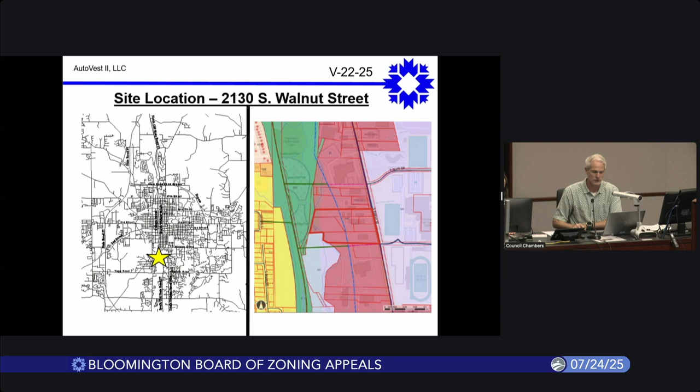So the overall petition site encompasses several properties. One of those is an existing Kia dealership that is located on the south end of the site. The petitioner has acquired several properties to the north of that dealership, and will be looking to remove all of those buildings and parking areas to expand the display area for vehicles for sale for the Kia dealership.

The property also has Clear Creek on the west side of the property with its associated floodplain and riparian buffer, as well as a substantial amount of trees on that. The property in general is relatively flat along the east side of the site, and then there's kind of a steep drop-off as it drops down, and that's where you have all of the floodplain and the trees that are being preserved in the riparian buffer.

So as I mentioned, the petitioner is requesting to expand this use on the site by removing all of the buildings and parking area to the north to allow for that to be converted to new display area.

So in your packet, you do see a site plan, which is also displayed on the screen here. This incorporates several new islands within the site as required. Islands are required not more than every 10 spaces. Each of those islands is also required to have a tall canopy tree as well as 4 shrubs.

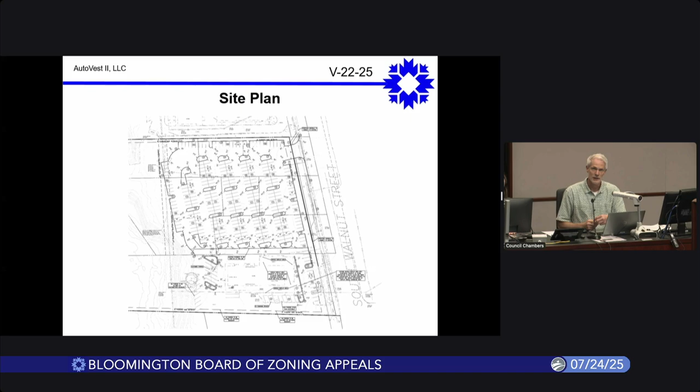So one of the variances being requested tonight is to not require each of those islands to have a tall canopy tree. Instead, the petitioner has shown those to be planted with small species trees. They are showing all of the shrubs required within those islands, but they're requesting a variance to not require the tall canopy trees.

The other 2 variances they're requesting in regards to landscaping involve the total number of shrubs required. With this petition, the petitioner is showing a total of 323 parking spaces, so that would require a total of 969 shrubs. With the 323 parking spaces, they are also required to have 81 tall canopy trees. Those canopy trees and shrubs have to be within a certain distance of the parking area in order to count towards the parking lot landscaping requirements.

Given the location or the areas they have available to utilize for parking, they are requesting a variance to not require the full amount of shrubs. So they're requesting to allow 454 shrubs versus the 969 that would be required, and a variance to allow 24 tall canopy trees rather than the 81 tall canopy trees that are required.

The other variance they are requesting is from the maximum spacing for street trees along the front. The UDO says that tall canopy trees are required along a street not more than 30 feet from center. The petitioner, due to several utility lines along here, is utilizing a small-medium tree, which is fine, but the UDO says that if you're using the smaller species tree, the street trees can't be more than 15 feet from center. So they are requesting a variance from that 15 feet to allow for them to be 40 feet on center.

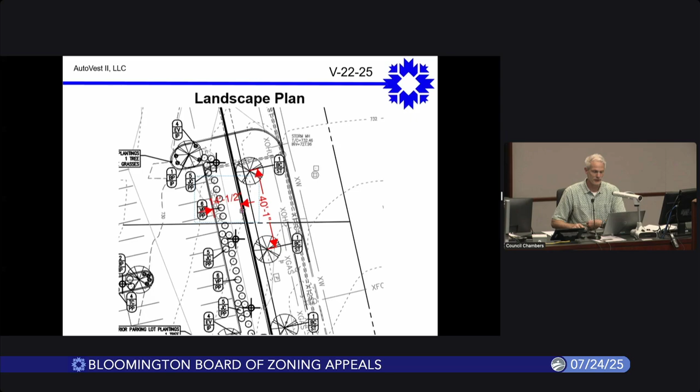Also in this exhibit, I've shown the spacing for the street trees. The petitioner is requesting a 40-foot separation versus the 15. So again, we are recommending denial of that particular variance, but I'll talk about that as I step through the criteria. I just wanted to point out those 2 elements on that exhibit so the board can see what we were looking at in relation to the requests.

So with that, all variances are required to be evaluated on 3 criteria. The first is that the approval will not be injurious to the public health, safety, morals, and general welfare of the community. In regards to the street tree separation, we did find negative findings in that regard.

Obviously, the requirement to have street trees and spacing along there is to create a uniform design along streets. Having a 40-foot separation between small and medium trees is a lot larger than what the code allows for, and creates significant gaps, which would enable this property to be a lot different in terms of a uniform streetscape along a street that we would want to see. So we did make negative findings in that regard.

We did not find any other negative impacts in relation to the other three requested variances, in relation to the approval being injurious to the use and value of the area adjacent to the property that would possibly be affected in a substantially adverse manner. Again, we did not find any adverse impacts on the uses or values adjacent to the property for these requested variances.

As I mentioned, the site has a substantial amount of landscaping on the west half of the site that's heavily planted with trees and other understory vegetation. So the variance request to have less landscaping around some of the perimeter of the area and on the site as a whole is somewhat offset by the large amount of vegetation.

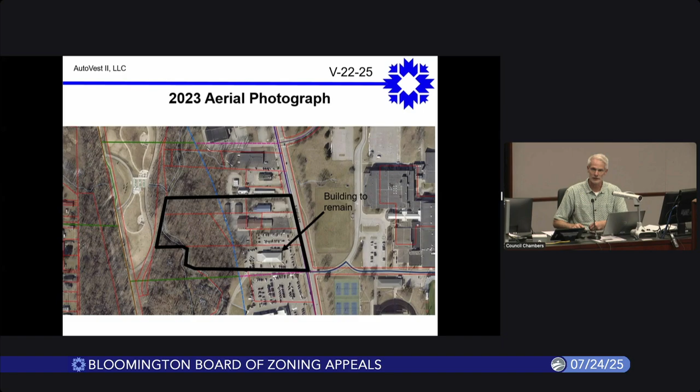Going back to the aerial, almost half of the site is encumbered by the floodplain of Clear Creek, along with trees, the riparian buffer, and steep slope. So the petitioner is pretty much utilizing the only developable area left on the site, the east half, for the additional display area. Given the amount of vegetation on the remainder of the property, we did not find any adverse impacts on the adjacent use and value.

The third criteria is that the strict application of the terms of the UDO will result in practical difficulties in the use of the property, and that those practical difficulties are peculiar to the property in question. There are separate findings for each of these in relation to the requested variances.

In regards to the landscaping for the street tree spacing separation requirement, we did not find any peculiar conditions that prevent them from meeting the spacing requirements. There are no topographic challenges, no infrastructure improvements that don't allow the trees to be closer, no drainage features, or any other inherent characteristics that present a practical difficulty or peculiar condition preventing the street trees from being closer together and meeting the code requirements.

In regards to the minimum number of shrubs and trees required, both on the parking lot perimeter and within the islands, we did find peculiar conditions relating to the amount of developable property and the location of the building that prevent parking spaces from being installed in a way that would meet setback requirements. The location of the building, along with environmental constraints and limited developable area, certainly present peculiar conditions that create a practical hardship in meeting some of those landscaping requirements.

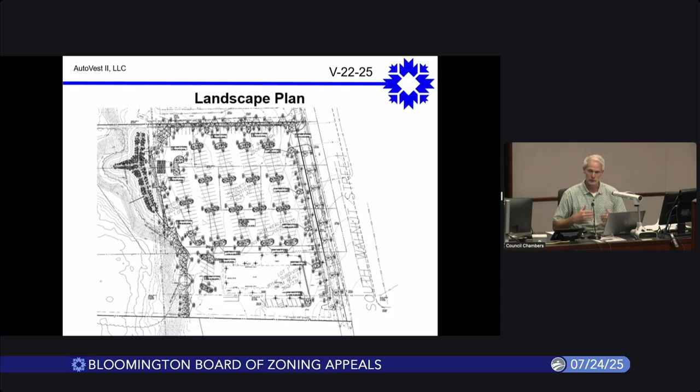Some of those are being placed along the west end of the property. There's a sanitary sewer easement and sewer line that runs along the west side preventing that location from being utilized. So the area they really have available is limited, which is why we looked at it a little closer to say there are trees that could be planted here. Some of the other trees they're showing are outside that 10-foot area, but most are along the north property line and a little on the west. So we're really trying to optimize the little amount of land we can get in to have more tall canopy trees.

Is it correct that the whole preservation area has several tall canopy trees? We don't have an inventory of the trees actually in that area. I would imagine there are certainly a substantial amount that would be species identified as tall canopy tree species. But again, different landscaping has different purposes based on where it is - some of it's just getting living materials on a site, while other landscaping has purposes in terms of shading and shielding parking areas.

My last question is to the petitioner. Is it a peculiar condition that if you have those tall canopy trees in the front landscape area, would that be harmful to your product sitting there - I'm talking about the cars on display? That is correct. We believe over time, having them where he's asking for them would create danger of branches and leaves on a regular basis. It's very difficult on a dealership with display vehicles to have large canopy trees.

Again, I want to reiterate, our owners already made a compromise to do that on the north side of the property to help buffer, someday if a restaurant or whatever reutilizes that particular property, which is currently vacant. So we feel like we've already compromised on that side, and we're doing about 13 large canopy trees on the north side of the property, brand new ones.

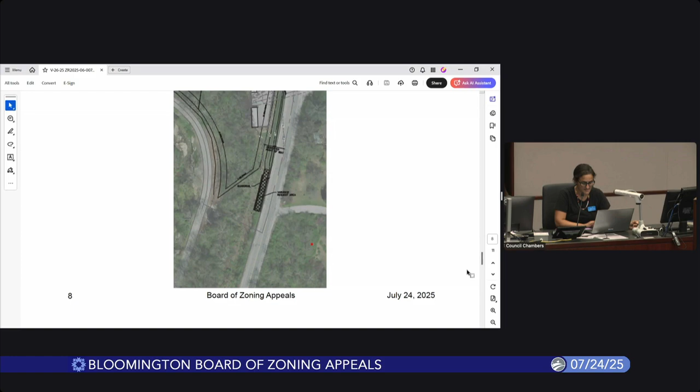So it's this portion here, this 108 feet, that they're requesting the variance for. And the reason being that there is steep slope at this location. I think I did not spell this out well enough in the staff report, but additionally, the way that we get public facilities in the right-of-way that aren't just built by the city is through private development.

So in this case, for All American Storage, they're building the required pedestrian facilities from the transportation plan because they are building a brand new building. And typically properties are abutting other private properties, so it's kind of like a domino effect—if they build theirs, then the guy next to it, when he goes to redevelop, builds his.

In this case, there's almost 250 feet of publicly owned property or right-of-way between the end of their property and the next private property. You can see this blue line here. So if they built theirs to this location, which would be just north of the roadway across Walnut, we are still responsible as the city for the next 245 feet before it hits another private property.

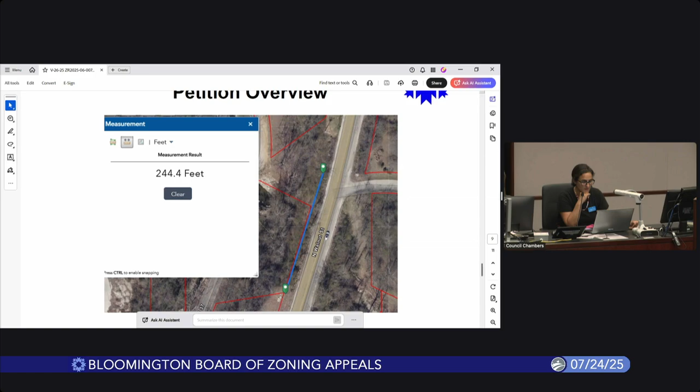So when we were looking at it that way and talking to the engineering department, because of the slope constraints here at this particular location—the part they're requesting the variance for is where it starts to get redder on these 2-foot contours—that is why there is a railing along here now, a guardrail, because it drops off quite a bit.

It was determined by the engineering department, in consultation with long-range transportation, the planning department, and development services, that it would make more sense to design this all as one piece rather than build the 108 feet now and additional linear footage later, because there will probably need to be substantial changes here to put that path in.

So based on the findings of fact in the staff report and what I've said tonight, the department recommends that the Board of Zoning Appeals adopt the proposed findings and approve this variance, with the condition that a zoning commitment for the determinate sidewalk variance be recorded and submitted prior to approval of the building permit for their new building. I can answer any questions.

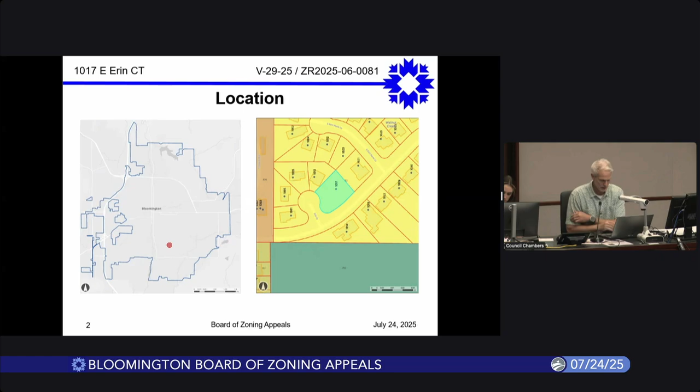Thank you. Eric Greulich, Development Services Manager. This is a request from Value Built, Inc. for a property at 1017 East Erin Court. The petitioner is here tonight to request a determinate sidewalk variance in relation to the construction of a new single-family house on this residence. The property is zoned single-family residential, or residential medium lot, R2. The property is vacant, and the petitioner is looking to construct a new house on it.

There is a sidewalk along Azalea Drive, on the south side of the property. The UDO requires that when you construct a new house on a classified street, you install the required pedestrian facilities along that street. Since this property has frontage on two streets, it's a corner lot, with Erin Court on the west side and Azalea on the south side. With construction of the new home, they are required to install pedestrian facilities and tree plots along both frontages per the transportation plan.

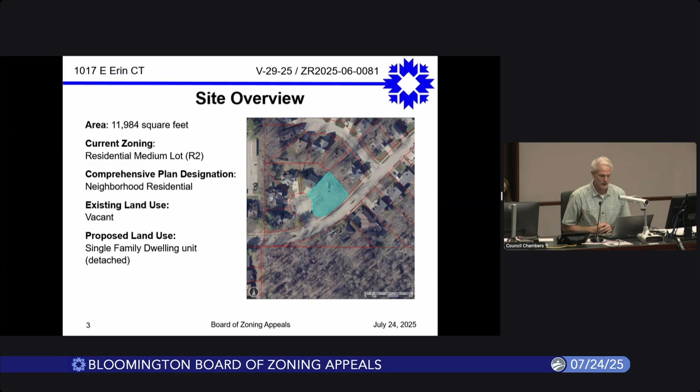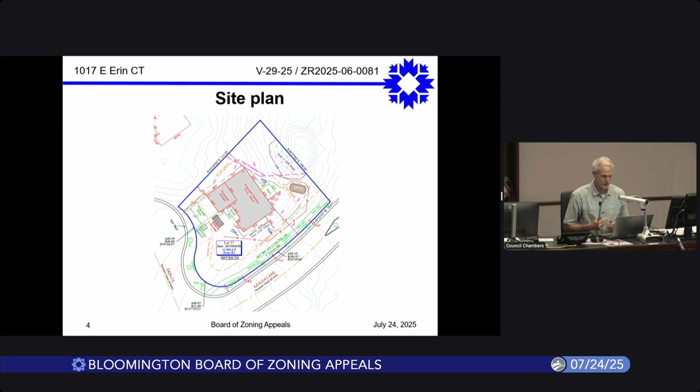The transportation plan requires a 7-foot sidewalk and an 8-foot tree plot along Azalea, which is what they're requesting a determinate sidewalk variance for tonight. They would install the sidewalk and street trees along Erin Court, but they are requesting relief from the sidewalk requirement along Azalea in order to allow the existing facility, shown here, to remain. The current facility along Azalea is a 4-foot wide sidewalk with a 5-foot tree plot, whereas the transportation plan would require a 7-foot sidewalk and an 8-foot tree plot.

In addition, the engineering department was able to go out and evaluate the sidewalk. There were a lot of panels deemed far above the cross slope allowance for ADA accessibility, so a majority of that sidewalk was deemed not functionally compliant and would have to be removed. The petitioner is requesting the determinate sidewalk variance to allow the existing facility to remain. If the variance was granted, they would still have to replace the panels deemed out of compliance, but in terms of bringing it into full compliance, the determinate sidewalk variance would apply.

Regarding the criteria and findings: first, that approval will not be injurious to the public health, safety, morals, and general welfare of the community. With new construction on a property, especially in a built-out single-family neighborhood, there are very few opportunities to get compliant facilities in, so this is the only opportunity to get a compliant facility on this property. Requiring the sidewalk to come into full 7-foot compliance allows for facilities consistent with the transportation plan's goals for the neighborhood. We found that failure to comply would be injurious to public health, safety, and general welfare, since the wider facility improves safety and has a greater tree plot, which also improves safety. So we made negative findings in that regard.

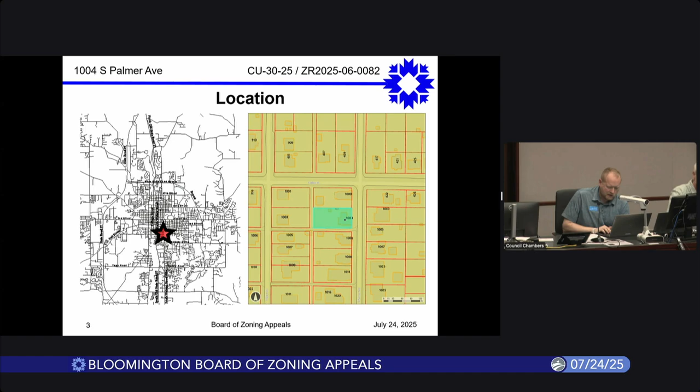You're ready. Good evening, Joe Patterson, zoning and long-range planner. So we are looking at a conditional use to allow for a duplex in the residential small lot zoning district at 1004 South Palmer Avenue. As you can see, that lot and all the surrounding properties are zoned R3.

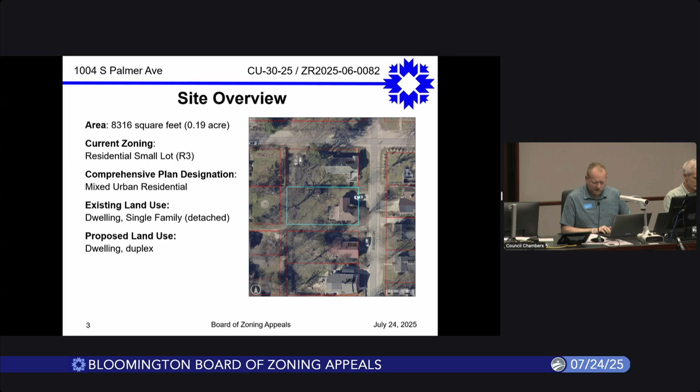From the quick aerial here, you can see some of the existing roof lines and materials. This duplex is being created through an addition to the existing home with an integrated carport separating the two portions of the duplex. The addition will run past the rear of the home along the alley on the west side of the property. There's an existing drive and parking area on the northeast corner of the existing home. And as you can see here, the alley on the left would run back to the new addition as well as that carport. Because of requirements from the UDO, with the carport access from the alley, the existing drive area would need to be removed so that there are not two drives on one property.

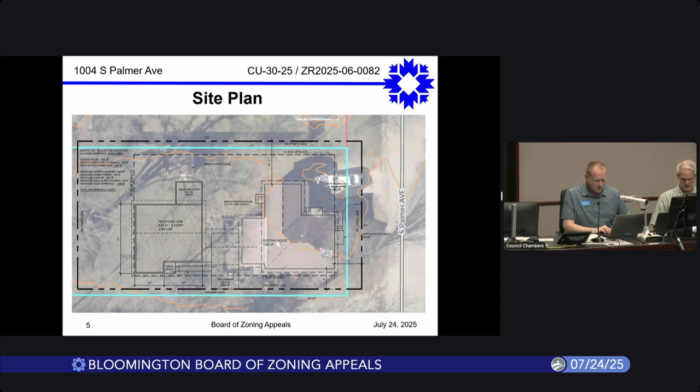The existing residence has one bedroom. The planned addition to create the duplex would have two bedrooms, one on the ground floor and one on the second floor. And as you can see from the elevations, that carport would be there in the middle, separating the two, as well as the entrance facing the alley for the addition.

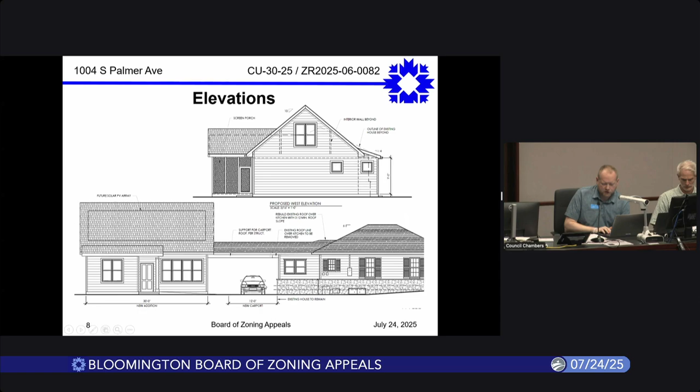So looking at our criteria, all petitions are subject to review pursuant to compliance with the UDO and other applicable regulations. We find that a dwelling duplex in this zoning district meets those standards, as each part of the duplex will have its own entrance.

The existing and surrounding residents on the block face would have a similar roof pitch and design of materials. The duplex is not going to exceed bedroom allowances, and there are no other applicable regulations that would apply.

For consistency with the comprehensive plan and other plans, the comprehensive plan defines this area as mixed urban residential for future land use. As this is an older neighborhood, there's expected to be a larger variation within architectural standards and designs, and also allow for redevelopment.

Within the comprehensive plan, policy 5.3.1 encourages opportunities for infill and redevelopment. By adding this addition to create a duplex, it helps accomplish those goals of the comprehensive plan.